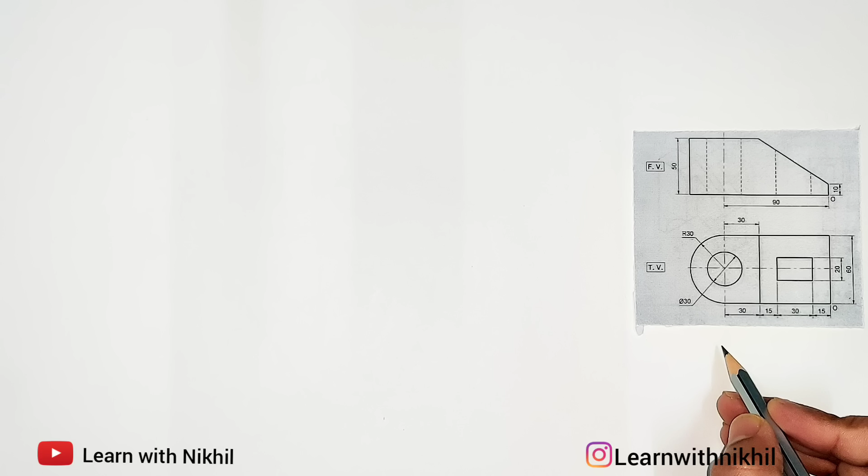So in this lecture we are going to see an isometric projection sum where we have been given the front view and the top view and we have to draw its isometric view. So let's begin. So first step, always see the vertex O and we will calculate the three dimensions using the front view and the top view.

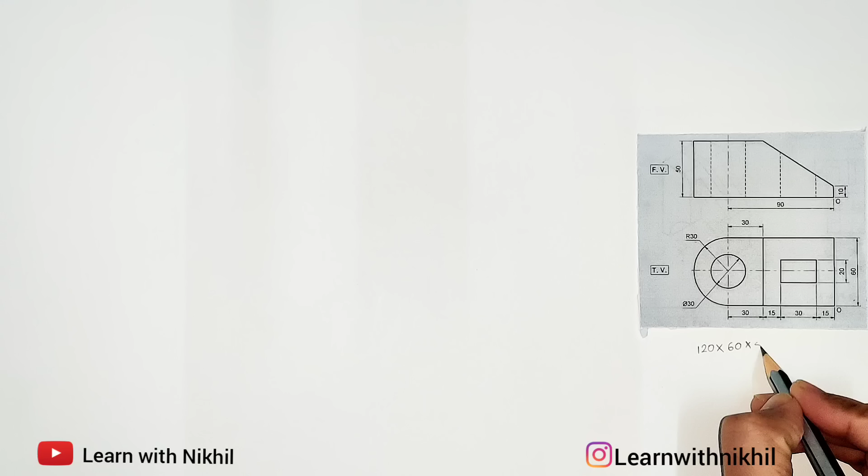So the three dimensions: this total distance is 30 plus 30 plus 15 plus 15 and the radius last is 30. So the total width is 120. The depth of the figure is 60 and the height given is 50. So these are the three dimensions. Using these three dimensions, first we will draw a rectangular box.

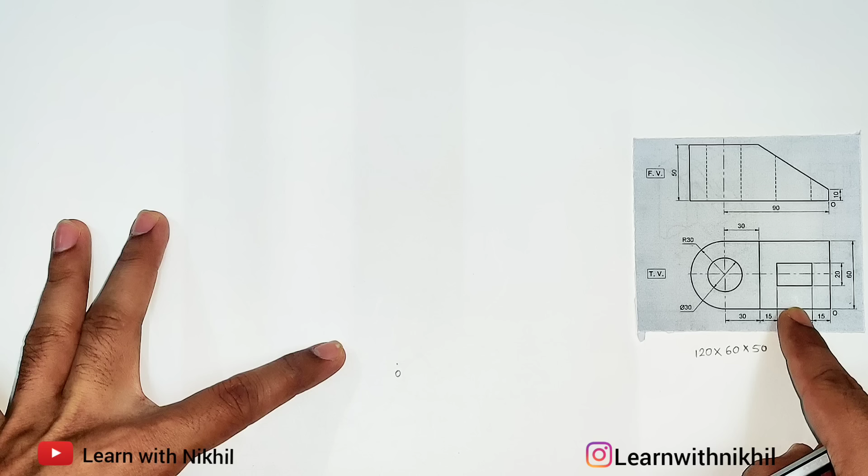So first step, we will draw a horizontal straight line. We'll mark a point O on it. So this is the point O we have considered. This side from the point O, left side here will be the width of 120. So on the left side we have to keep much space. Drawing the line, then marking the angles, that is 30 degree and 90 degree.

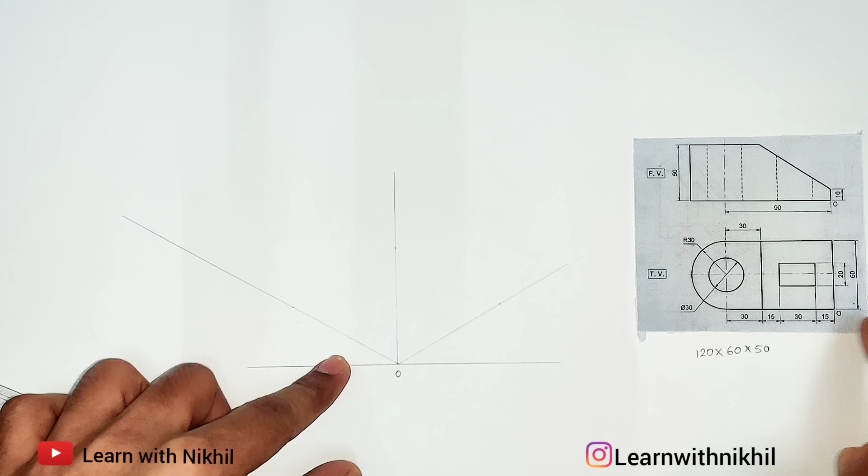Now as you can see from O, on the left side we have a distance of 120 millimeters. Here will be the height, that is 50, and here will be 60. So first we will mark these dimensions. This is 120, height is 50 and the depth is 60.

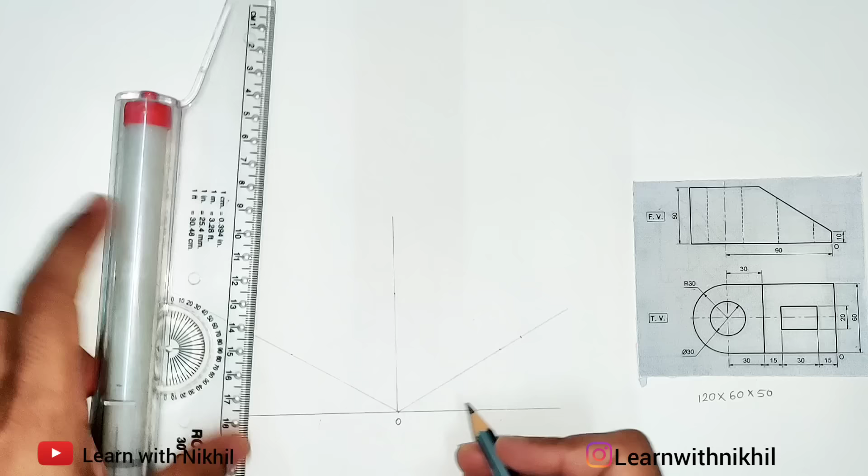Now using these dimensions we will create a rectangular box. The advantage of drawing the rectangular box is that we know that the total isometric figure, that is the three-dimensional figure, will be inside this box only. Draw the parallel lines properly and just check the dimensions whether they are marked properly or not. So we'll start the sum from this.

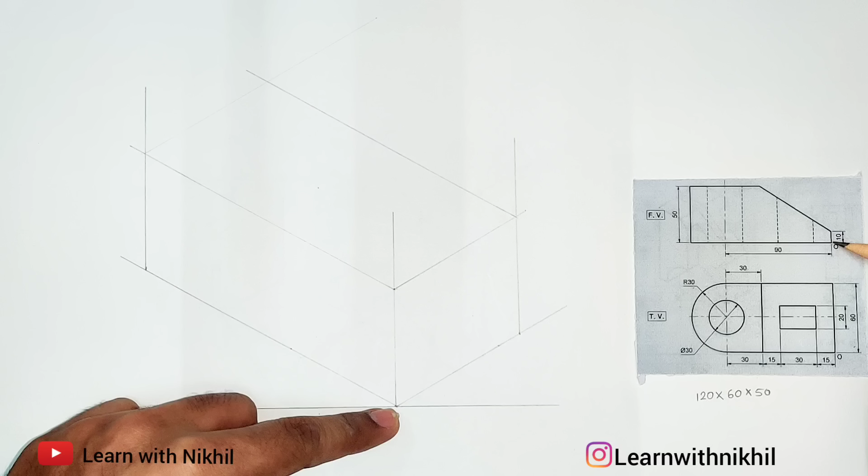First, from the point O, you have a height of 10 millimeter. So you can see a dark line of 10 millimeter. So from here I'll mark a dark line of 10 millimeter. I'll make this dark. So we'll start from point O. Now from here you can see from the top view there is a straight dark line. So this will be a straight dark line.

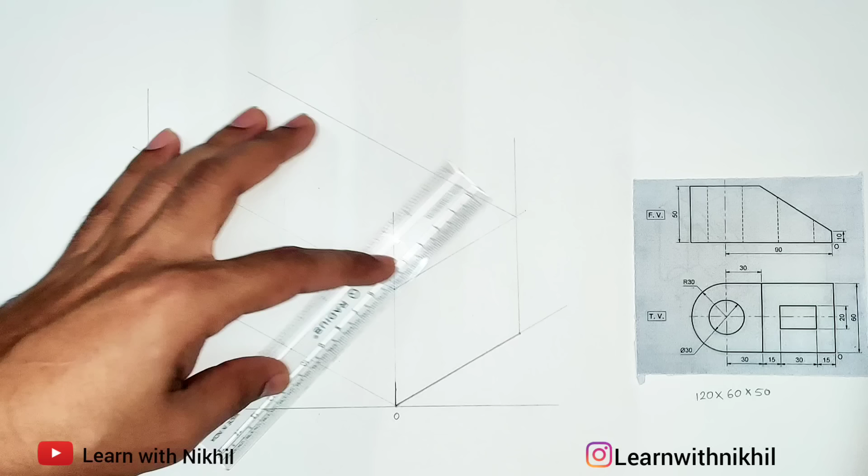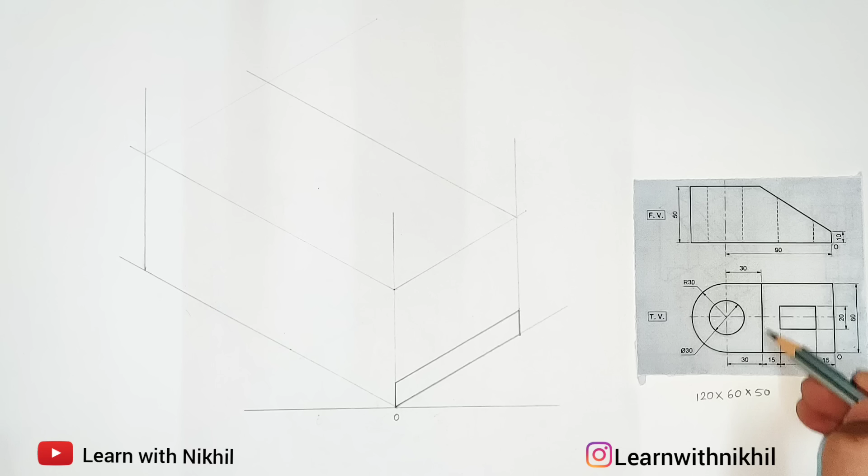Now the same thing is on the other side as well. So this is the point from the top view. Now joining this. So this part has been done. The straight dark line from the top view, and from the front view you can see a height of 10 millimeter. Now you have a slant line. Slant line is extended till this point.

Now the dimension here you can see. You have a semicircle at the end and this semicircle radius is 30 and this distance is 30. So the total distance is 60. So the slant line is till this 60. So from here we have marked a point 60. So this is this point.

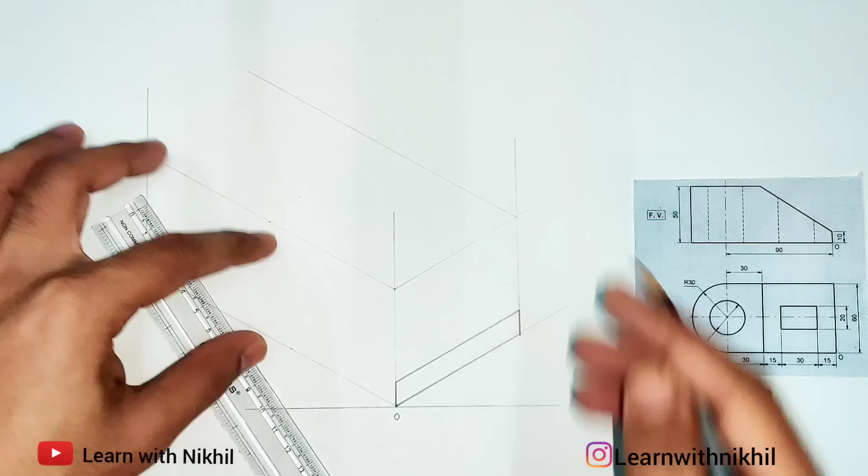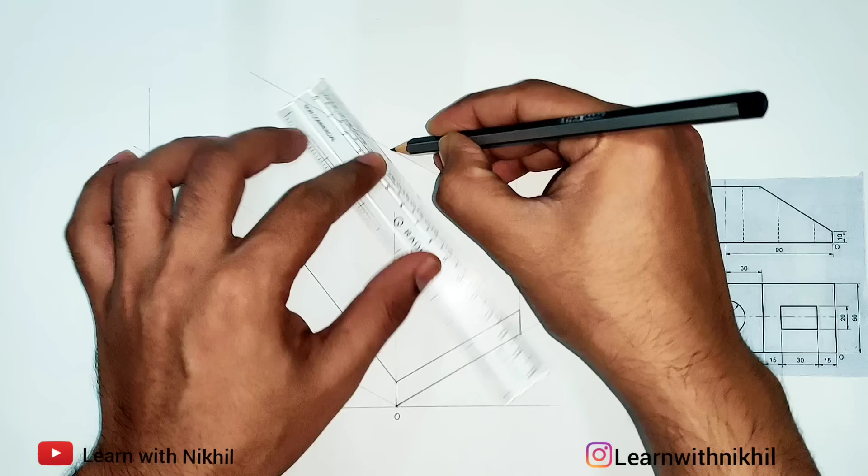So as you can see here also the projection. So this distance is 60 millimeter. So from here we will join the point. So this will be the slant line. Same we will do it at this side also, as it's the same projection on the opposite end.

Now joining this, we'll take the parallel line from here, reference, and we'll join it. Or you can directly join the points, it will be one and the same. So this will be the dark line and the slant part.

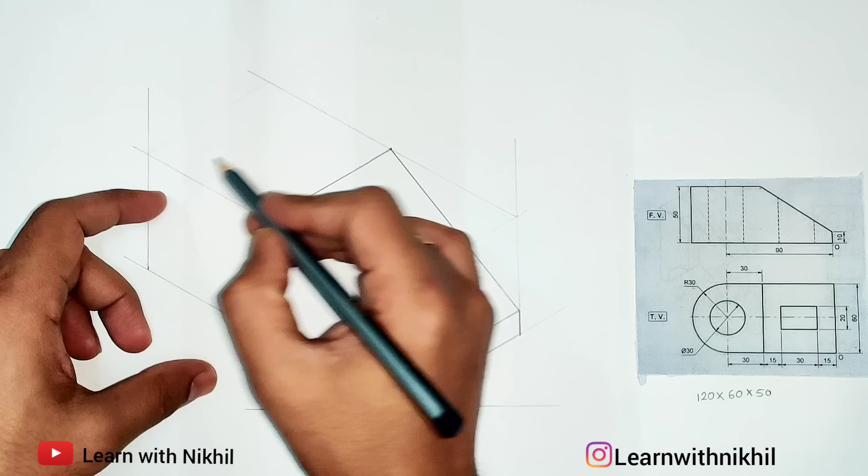Now here we'll have to draw the semicircle and the circle in between. Now to draw the semicircle, as you know, first we have to create the square of the diameter. As the radius of the semicircle is 30, the diameter is 60. So we'll draw the square. It is already there. This square is of 60 side. Then join the longest diagonal, and from the shorter diagonals we'll join at the opposite ends. This is the process to draw the semicircle or the circle.

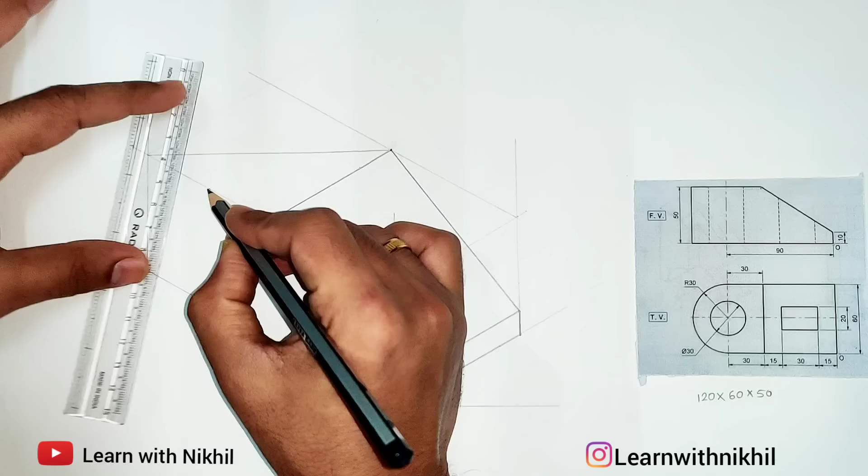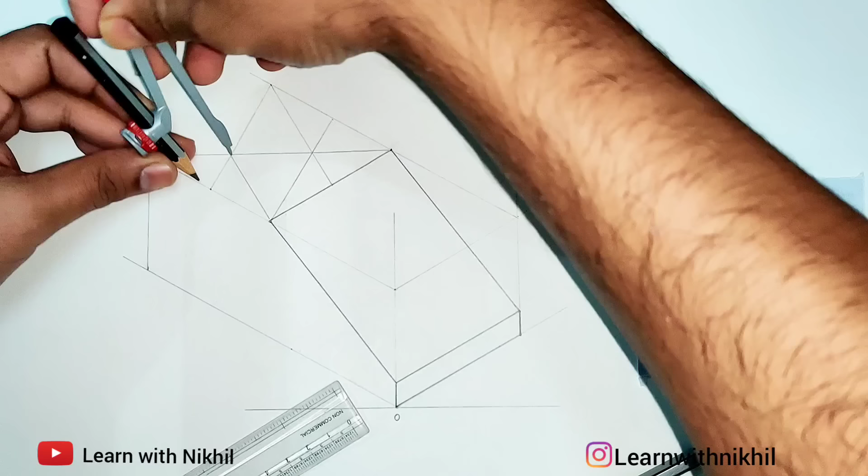So this is the midpoint. Join from the smaller diagonal, midpoint, join from the other end. Same we'll do it at the opposite end also. It will pass from the center point. Now for drawing the semicircle we'll require this point. See how I am drawing it.

This is this curve. Now the remaining curve, keep the vertex pointer here and we'll draw the curve. So this is how we draw the semicircle. So the semicircle part is done. Now we have to project the semicircle at the bottom side also.

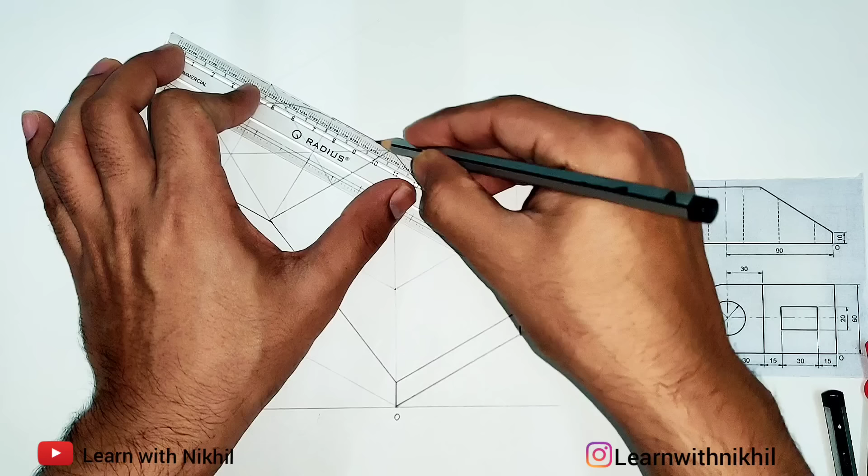First we'll join these two lines. This will be the dark lines. You have to project this at the bottom part also, as it is totally cut. You can see the curve part, it is at the bottom side also. So you have to just project this curve below at the height of 50 millimeters. So we'll first take the projections from these points, the vertex and the end point of the curve.

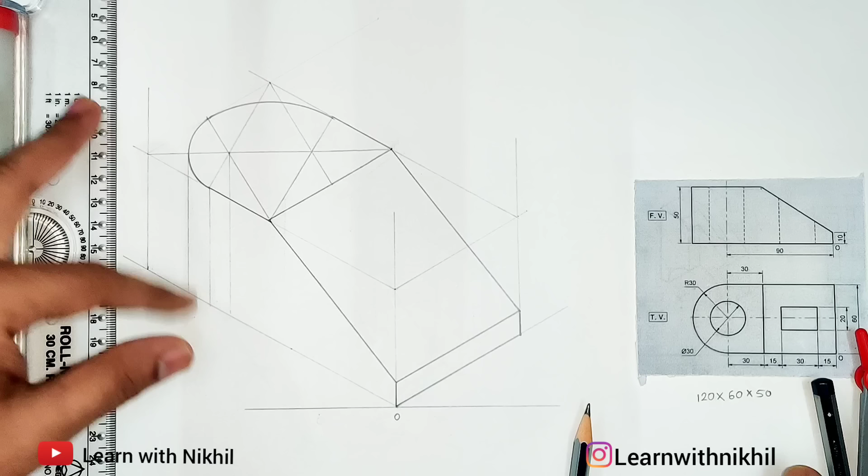Now we'll take the compass. Before that we will project the point 50 millimeter below. So as the height is 50, we projected the point 50 millimeter below. We'll take the compass, take this as the radius, keep it on the vertex and draw the curve. So this is how we project the curve at the bottom side.

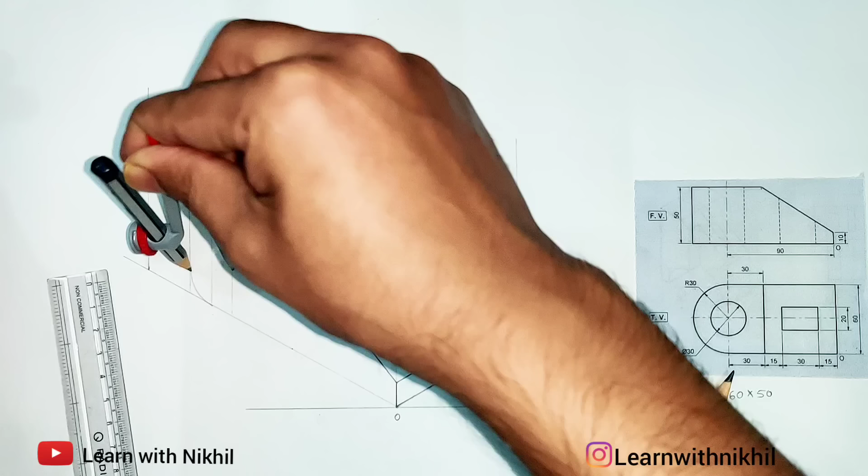After projecting the curve, now you can join this dark line. So this is how it is done. Now this part is done, the curve is done. Now you have to draw the circle at the center of this. You can see the circle diameter given is 30, so the radius is 15.

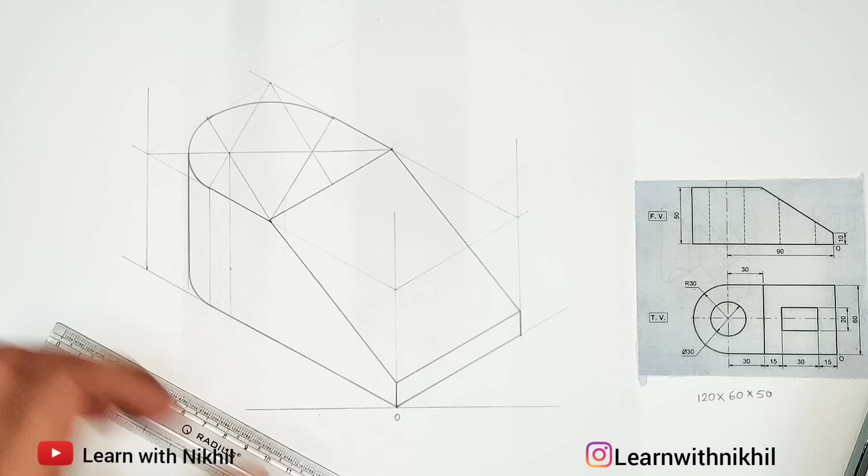So as you have to draw the circle of diameter 30, first we have to draw a square at the center with side of 30. So for drawing that, first I'll join these center lines. Joining these center lines will give me the center point. So the center point is this. Now through this center point we have to draw the square.

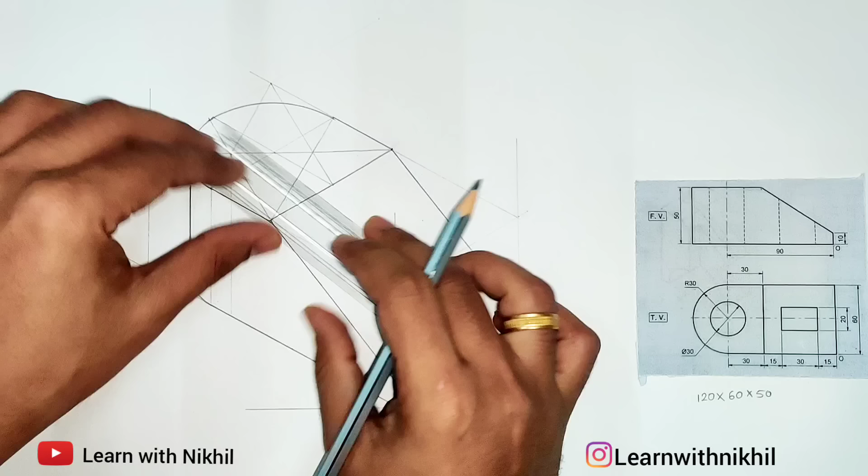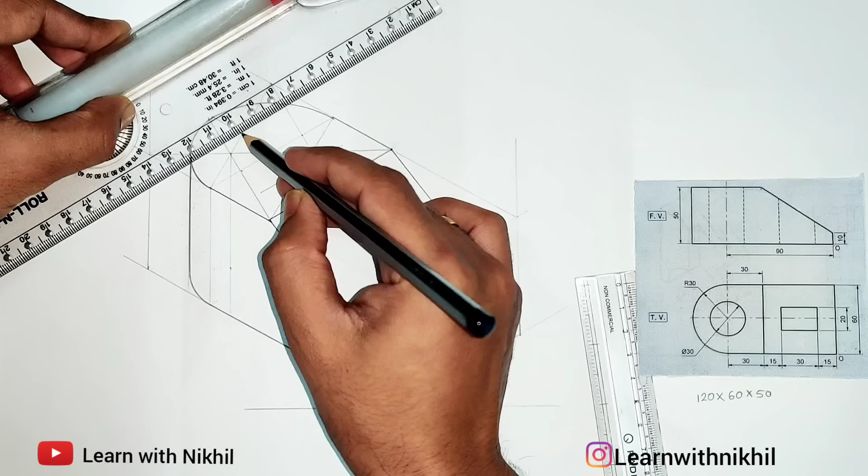So from the center, 15 millimeters on the line, 15 millimeters below. From here, opposite side 15 millimeter on the other sides. So we have got these 4 points, the 4 ends of the square. Now through that I'll draw parallel lines from here, and taking this as the reference line, we'll draw the parallel line through these points and we'll join and we'll get a square at the center with side 30.

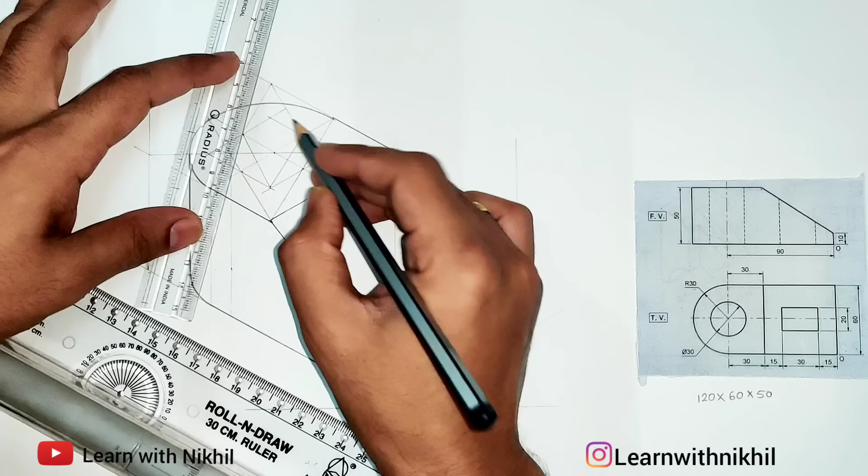Now the same process of drawing the square, the diagonal line is already there. So from the opposite ends we will join at the center point, at the midpoint of the opposite lines. We'll get these 4 points. Now through these 4 points we will draw the circle.

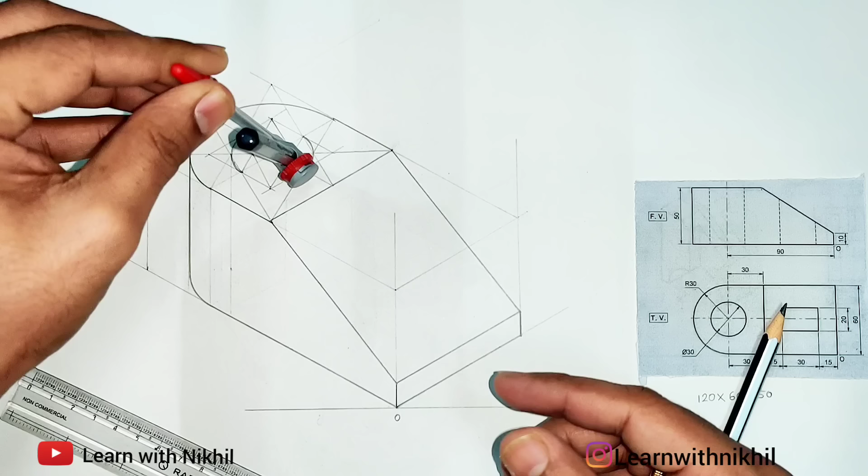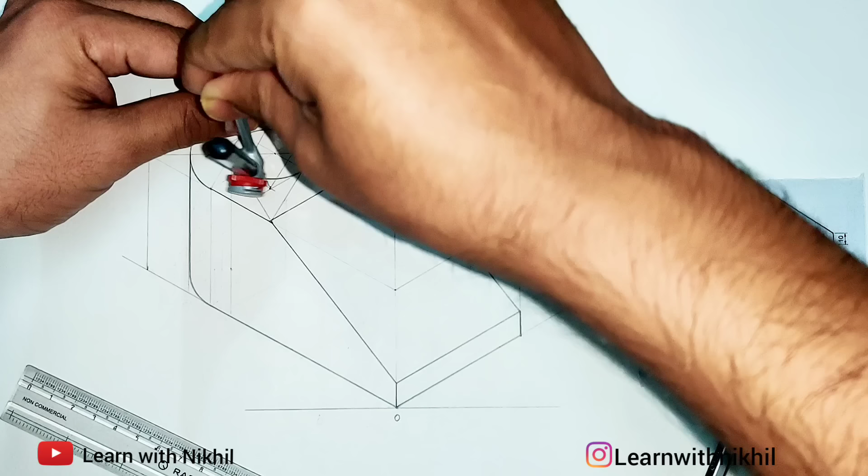So take the compass, take this as the radius, draw the curve with same radius but keeping the pointer here. Draw the curve at this side also. Now keep the pointer here, take this as the radius, draw the curve with same radius, keep the pointer here and join the curve. So this is how you create the circle. So with this we have created the circle with diameter of 30.

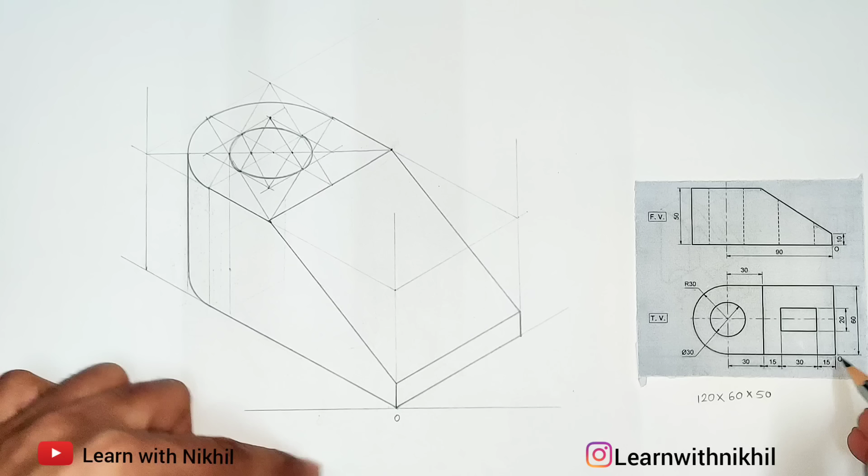Now the final part is remaining. You can see here there is a cut part which is drilled totally till the bottom. You can see the projection here, it is given dotted, so it is totally drilled from the top to the bottom. Now as you can see, the slant distance is not given, the side distance is given, which is 15 millimeters.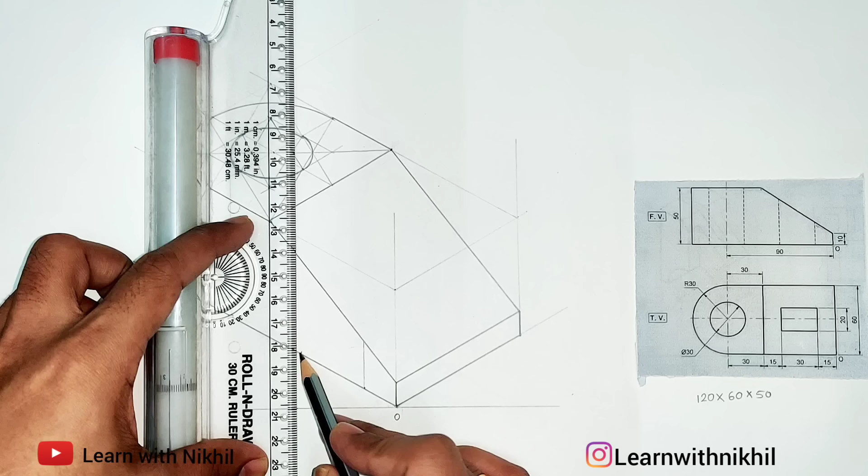So here we are marking 15 millimeter, then we have a 30 millimeter distance of the cut part, this is 30. Now with this dimension we will project this line on the slant part. So we'll project this upward till here, project this upward. Now taking the slant line as the reference line, we'll project the line on the slant line. So taking this as a reference, draw the light line, here also draw the light line.

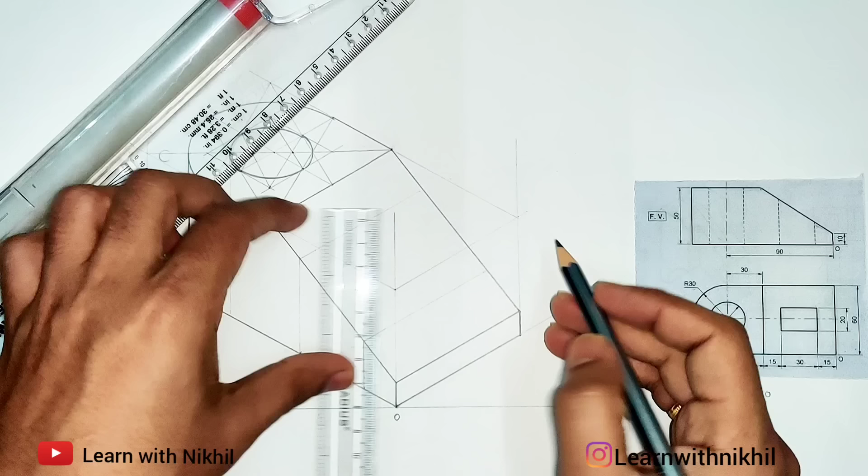Now the cut part width given is 20. So from the center we will mark 10 millimeters on both the sides, which will give me the distance of 20 millimeter. Now taking this as the reference parallel line, this is the slant line, we'll draw dark line here, we'll draw the dark line here. So these are the edges of the cut part. Now joining this, this is how we get the cut part.

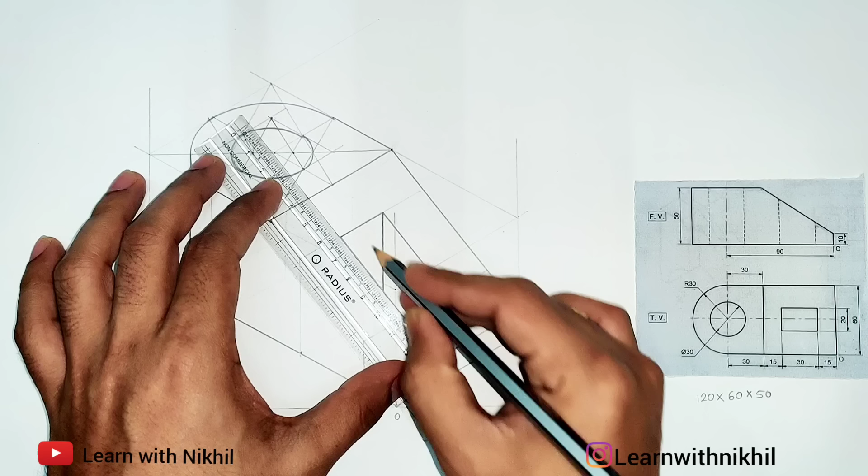Now as it is totally drilled from top to bottom, there will be an inner edge also. For drawing that inner edge, we'll take this as the reference line and we'll draw a dark line here. So this is how the cut part is drawn. And with this we are totally done with the sum. The only part remaining is the dimension marking and we are good to go. So see how I am marking the dimensions. All the dimensions given in the figure, we have to mark it. Don't forget to mark the arrow X, which is denoted as the front view.